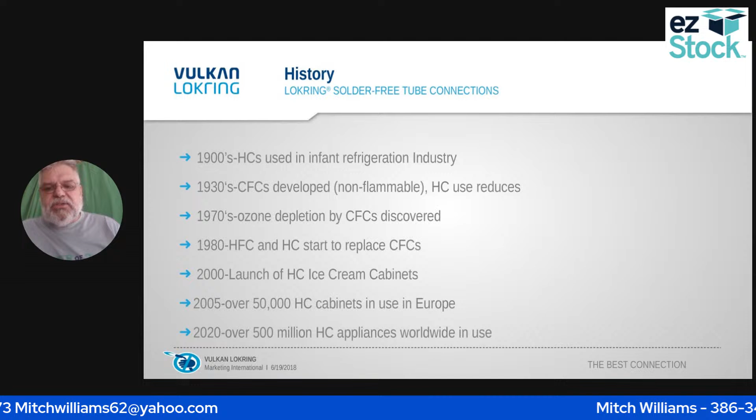So we had phased out the CFCs, replaced it with an HFC, as we are in 134A, which is what the HFC was, and then they started phasing out the HFCs and started replacing it again with the HCs, which is basically your butane mixture. Okay, so here's kind of a list of it.

R12, that's the first one. Whenever I was in my infancy stage as an employee working on refrigeration, that was R12 - that was the CFC. The ozone depletion rate was 1. Your 134A came about - R12 was phased out, we went to R134A, that was an HFC. At the same time, we had moved around and moved some other stuff in place of the R134A. They had come out with, in between the R12 and the R134A, what they called a hot shot - that was a drop-in for the R12. That didn't work very well, so they went ahead and moved to the 134A.

At that point, we moved from the 134A to the R600A in the refrigeration portion of appliances. Then you had R290. There is also an R441, which kind of replaces what they used in the ice machines. Then we had R404A - that's an HFC. They changed the R404A HFC to an R170, which is a hydrocarbon. And then, of course, the R32 is the HFC also.

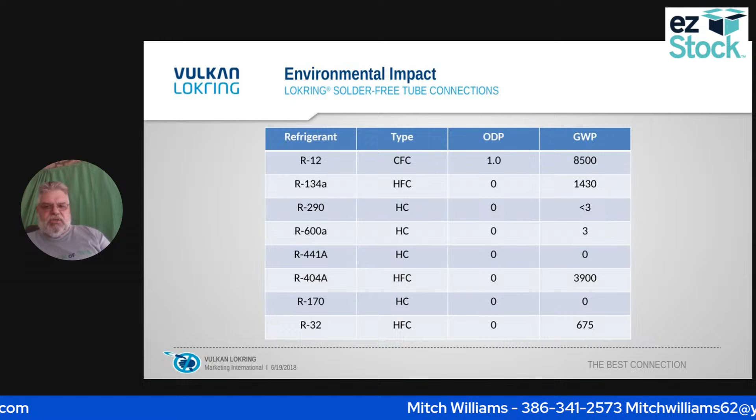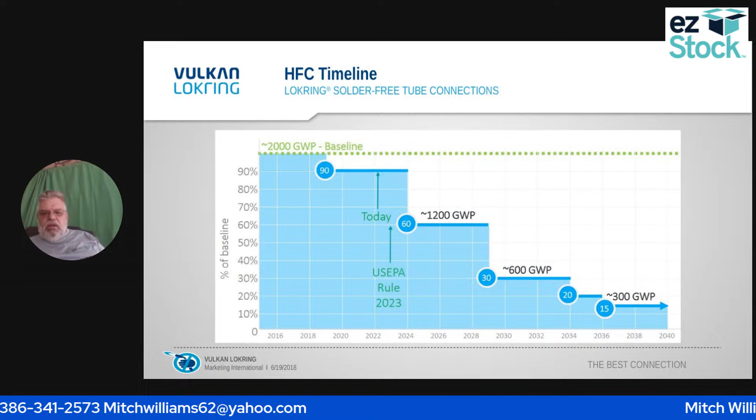That needs to pull out around 2029, I think is where it is. They're going to drop it again, and then they cycle it down to 20, then down to 15 - that's in 2036. If you've noticed, your refrigerant - if you release refrigerant into the atmosphere - it has changed from a $5,000 fine to a $50,000 fine, which is what they are at today.

So if you make the mistake of releasing refrigerant into the atmosphere and you get caught, they can fine you up to $50,000 today.

Okay, so we got R600, which is our A3 classification, and it does not require recovery. Same thing with R290. You don't have to recover 290, but they are flammable.

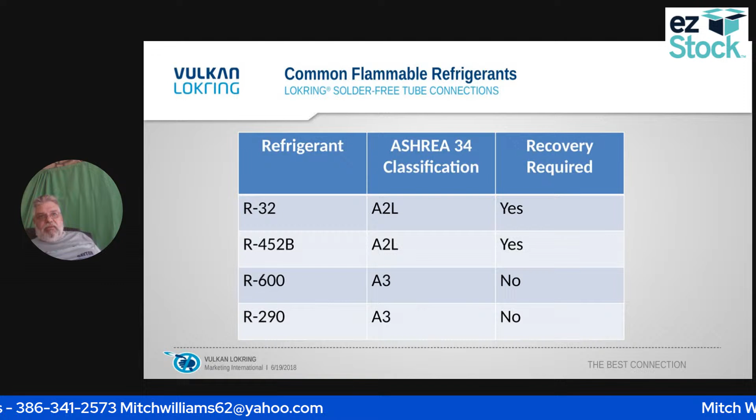This flammable refrigerant, you have to be very careful whenever you're using it. One of the things that people don't realize is that the oil in the compressor will actually absorb some of the refrigerant, and you can have a flash fire caused by that.

So exactly what is required for me to get flame? I need to have fuel, that would be my refrigerant today. Then I need air, that's all around us. Then we have to have an ignition source. So what people don't realize is everybody thinks, oh, my ignition source is my torch, which is true. If I have those three in combination, I get a flame.

So what happens is, if I fire my torch up, all I have to do is have refrigerant in the air.

I don't know how you guys heat your torch. Some use the clicker, is what I call it. It has a little round piece that has a spark, a flint that goes across it, and that will ignite your torch.

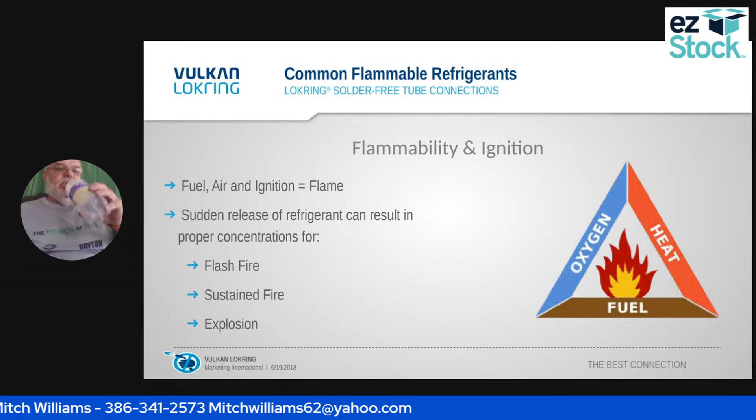So we don't want to use anything that could cause a reaction to get this ignition, this flame, to come out. So we don't want to use a torch. So what are the options?

One of the options is the Lokring system. Now, is the Lokring system the cheapest system out there? No, it's not. Is it definitely more expensive than some of the others? It is a little bit more expensive, but there's a reason.

These are tested. As long as you do use this unit, if I use the Lokring system, I have no problems having to go back. If I allow it to cure, the curing time, I'm ready to go.

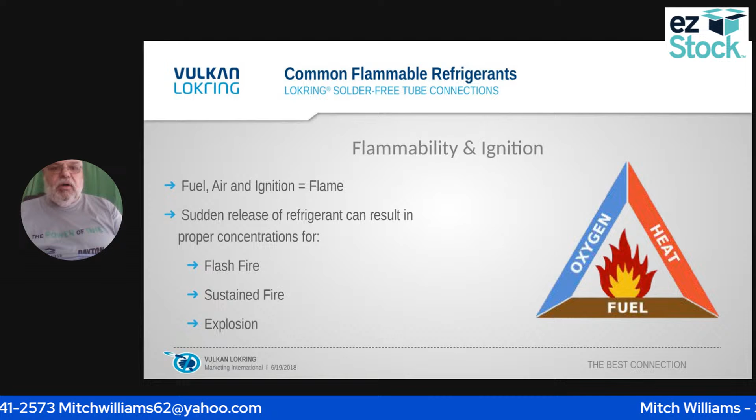So we're going to move on to our LEL and my LFL. Okay, low flammability limit, that's LFL, low flame limit. That's our R290 and R600A. R600A is at 1.8%.

The UEL and the UFL, that's the upper flammability limit. Our R600 is at 8.5, so that's pretty high.

So the last thing we want to do is get it so that we're having a flammability issue.

So who kind of regulates everything with us? The ones you want to be concerned with are the Environmental Protection Agency, the EPA, which is where you get the certification from. I'm going to need the National Fire Protection Association, the NFPA. I'm going to need the UL, Underwriters Laboratory. Then we have the International Electrotechnical Commission, the IEC. And then we have the American Society of Heating, Refrigeration, and Air Conditioning Engineers, the ASHRAE.

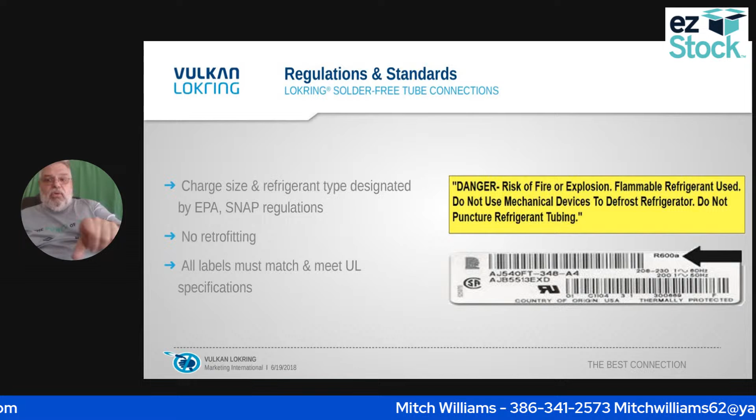Whenever I come in and look at the tag, I should see this: danger, risk of fire or explosion, flammable refrigerant used. Do not use mechanical devices to defrost the refrigerator, and do not puncture the refrigerant tubing. If you do, you run the risk of actually causing a fire.

So we're going to check what's on that label: our charge size, the refrigerant type, per the EPA and the SNAP regulations. So you can tell right there with the arrow that we are using R600A, which means we can't have any retrofitting done. All labels must match and must meet UL specifications.

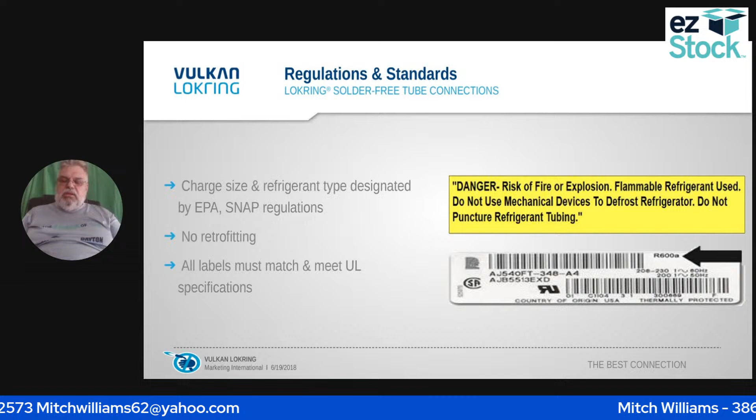Who kind of oversees all of this? AHAM, the Association of Home Appliance Manufacturers, and RSES. A lot of the others we don't really use.

One of the things I tell everybody whenever I'm doing refrigerant, and it's R600A, I have two things I keep right by my side. One is the fire extinguisher. What kind of fire extinguisher do I use? I have a dry powder.

If I carry the R600 on my truck, I have to have that. Of course, if I have that, then I have to have the MSDS sheet to go along with it. That has to be in my truck. You're supposed to have an MSDS sheet for anything that you carry in your truck. An example would be some of the cleaners. Anything that's refrigerant has to have your MSDS sheet.

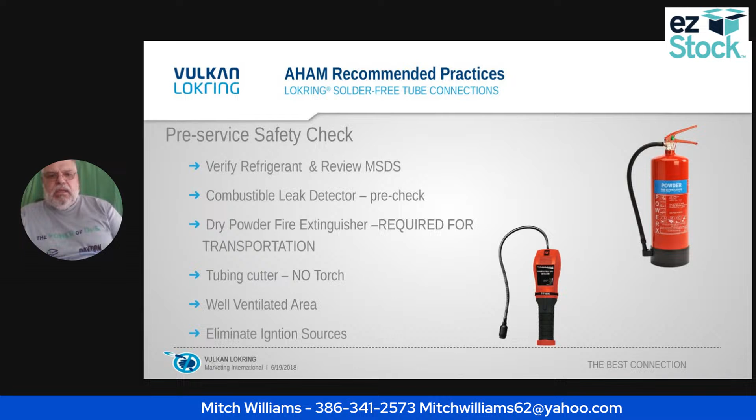I can use my dry powder fire extinguisher, and I can monitor any leakage with my leak detector. So we're going to go back and constantly monitor that.

Like I said, we're going to purge any gas into the external environment. That doesn't mean I do it in the house, because if I do, you're going to blow something up. Do not use an external heating source to defrost. In other words, you can't use a heat gun, and you can't use a hair dryer or anything like that. Do not use compressed air or oxygen if you're trying to flush something out, especially oxygen. If I'm using oxygen, that's one of the legs of my combustibility.

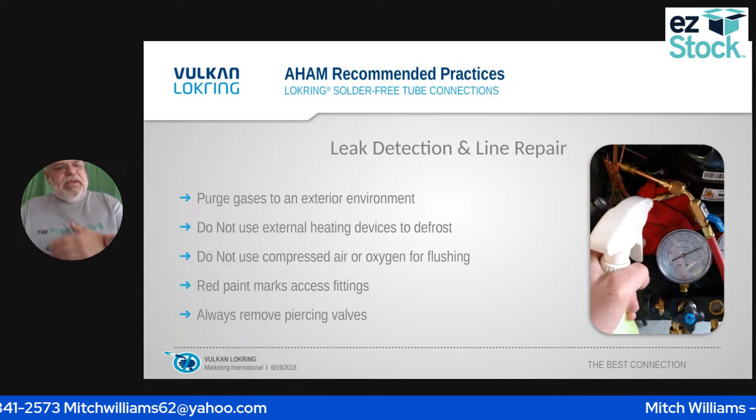Once I get through and I am done, and I have checked everything, and I'm satisfied with my work, I'm going to put red paint on the access fitting. That lets the next technician who comes out know that I have been in the system and repaired something. It also lets them know they need to probably ask the customer what was done last time. The other thing is, just like anything else, you're supposed to remove any kind of piercing valve.

Okay, so Lokprep versus UV leak detection. My Lokprep fluoresces with a bluish green under a UV light. Common refrigerant dyes show as a bright yellow - anybody that's used refrigerant dyes knows that most of them are bright yellow. The environmental condition is, of course, the lights off. You also have to have your UV light and my UV glasses.

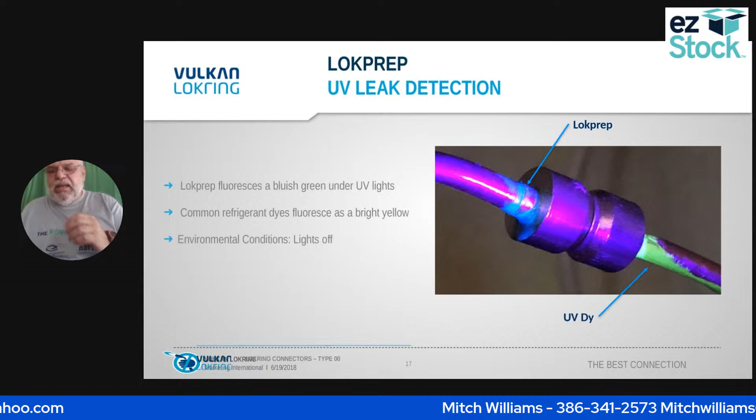Okay, so I'm going to repair any electrical faults. I'm going to secure any power. I'm going to discharge all the capacitors - once again, there's my spark. My system remains grounded. Then any of the lines that are going to be exposed, I have to insulate those lines that are exposed to corrosive material. Then I can renew my seals and sealing material.

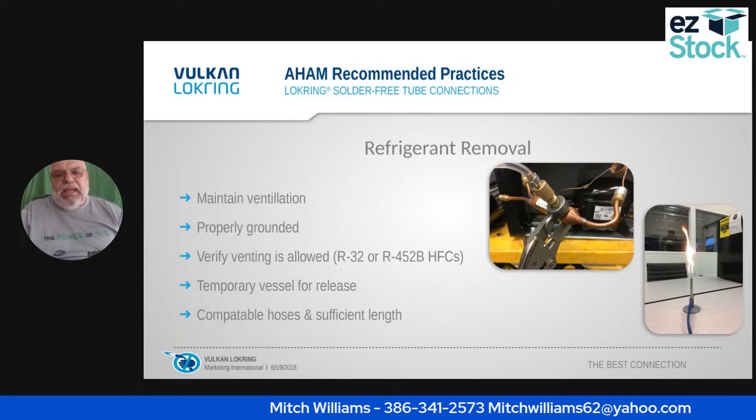After I get done, it is required for me to have this decal on the backs right at where the compressor is. It tells right here that it's an R600, and I have a flammability issue if I'm using it.

I have a guy I was working with who sent me a picture - I should have included it here. One of the guys was a new technician. The normal technician told him, 'Hey, listen, I got to go run to the office. Stay right here, don't do anything, I'll be right back.' Well, the guy said, 'Well, I just wanted to make sure that we got done as quickly as we could.' So he went ahead and used a torch to unsolder the compressor, and it burned down almost the whole shop that they had.

Okay, so my safety labels, I've got to have those whenever I replace them. If they're not on there, I have to carry some in my truck so that I can put those two labels on there. I'm going to use my red markings on my process tube. I'm going to install ventilation features - mine is a fan. Compressor oils may still contain residual refrigerant, up to 35% of the oil can contain refrigerant. 0 PSI does not mean zero refrigerant - that's one of the things you need to make sure that you remember.

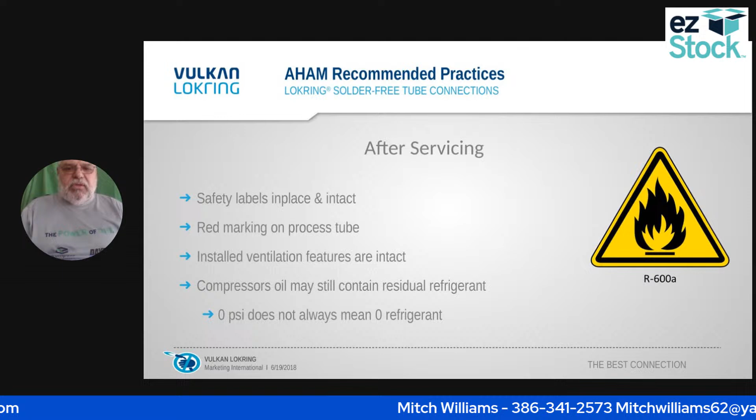Okay, here is this charging kit from Vulcan. If you see right there, there's about a 30-foot hose, maybe a little longer. It comes with the kit. There's the piece that I told you folded out - this is a picture of it, and of course you get everything that you're going to need in the kit, both the low side, the high side, the gauges, everything else. So this is a complete set.

It has a low pressure, high pressure manifold, R600 extraction valve, my liquid extraction disc, which is right there on the left hand side, the big piece that's white. We have a set of ball valves and T's that come with this kit. It has valve core depressors in this kit, and it also comes with the hoses - both the hoses right there that you see at the very top that I was talking about, and your regular hose that you use for your high pressure and your low pressure sides.

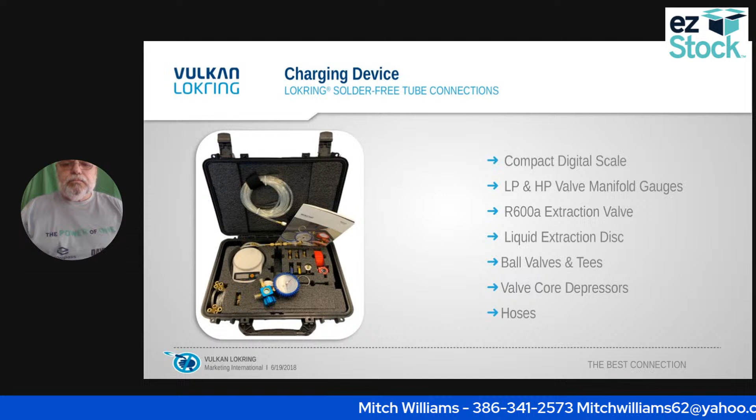Okay, so once I get everything done, I'm going to make sure I do a safety check. I'm going to monitor it with my leak detector, which I already mentioned. I just lay mine on the floor and it ticks. I've had one for years. Whenever I worked on gas, which is very popular in Atlanta, Georgia where I'm from, I always had one of these leak detectors. So I'm used to the ticking sound that the gas leak detector makes.

So you're going to run refrigerator for 5 minutes to warm the oil. I'm going to plug the unit in and let it run for 5 minutes.

The problem I'm going to have is if my compressor is totally bad and not working and I can't get it to work, then I've got to go ahead and cut the lines. I have to be very careful whenever I'm picking this up out of the back of the refrigerator, or whatever it is, could be an under-the-counter ice maker. I've got to be very careful, I can't spill any, because that oil still has a lot of flammability to it. Okay, I'm going to install a suction gauge, install the discharge hose to the piercing with the piercing pliers.

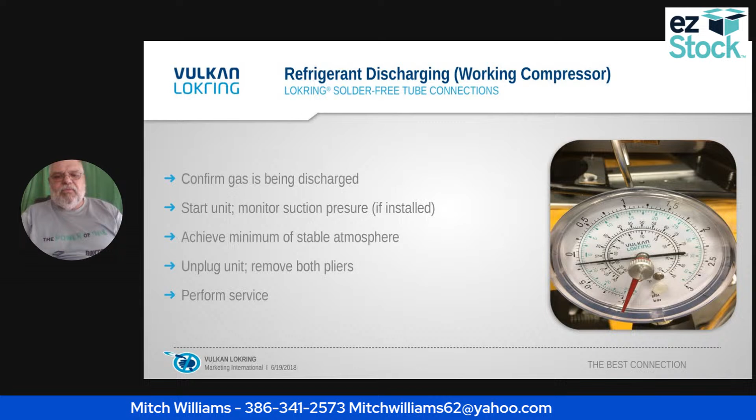So what I'm going to do is confirm the gas is being discharged. I'm going to start the unit and monitor the suction pressure. I'm going to achieve the minimum of a stable atmosphere. Then I'm going to unplug the unit, remove both pliers, and perform my service. Once I perform my service, I'm going to do a safety check and monitor it.

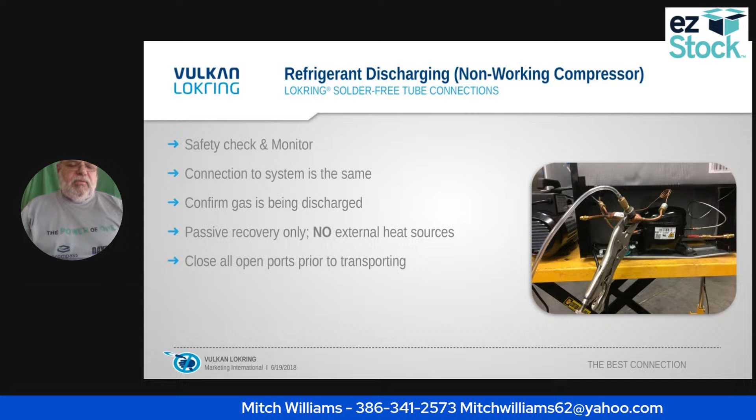This is for a non-working unit. The connection to the system is the same - confirm the gas is being discharged. Passive recovery only, no external heat sources, which is what we said from the very beginning. We're going to close all the open ports prior to transporting.

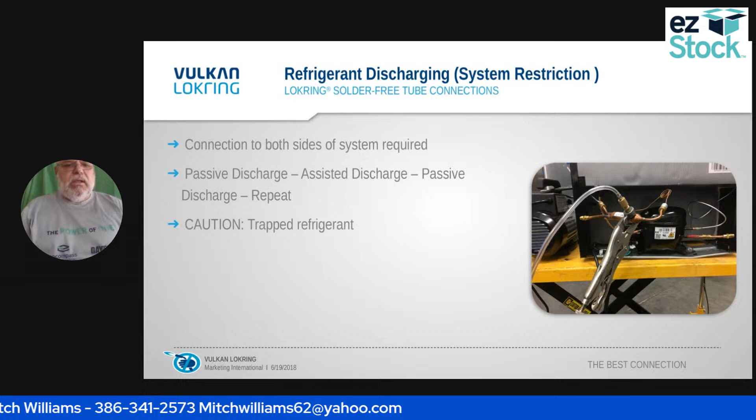So once again, I've got to, somehow, personally drain all of the oil into a container and then seal that container. My connection to both sides of the system is required - passive discharge, assisted discharge, and passive discharge again. Then I'm going to repeat it to try to get rid of all of the trapped refrigerant.

This right here, I'm going to tell you, if I was doing refrigeration work now, I would have a set of these pliers. I understand they're $174, but I still would have these. If I'm using any kind of refrigerant tubing and cutting it, I really, really like these tools. This tool right here is so great - I only have to do a quarter turn and I can cut everything off.

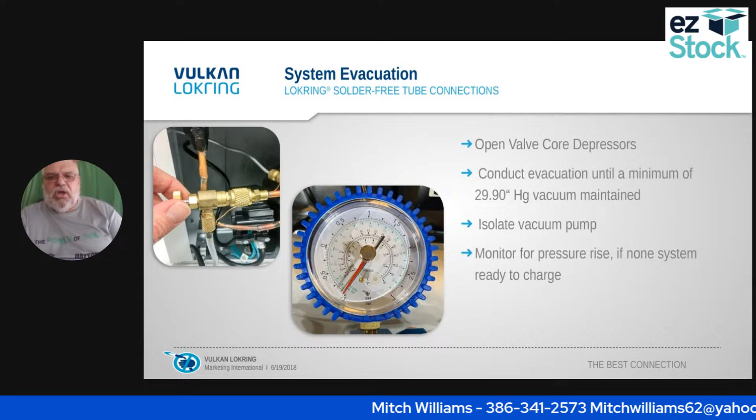We're going to evacuate the system, open the valve core depressors, conduct the evacuation until a minimum of 29.9 vacuum is reached. I'm going to isolate the vacuum pump, then monitor for a pressure rise. If none, then I'm ready to charge the system.

If this unit has 40 grams or more, I can charge from the liquid side. Up to 40 grams, I can't charge on the liquid side, only the high side, so I cannot charge the low side.

If I do that, I'll make this little valve explode. Not explode, but it won't work. And they check every single one that comes in. If you've charged it above 70, or nail it all the way on the other side, you're going to end up with a broken valve. That valve is no good.

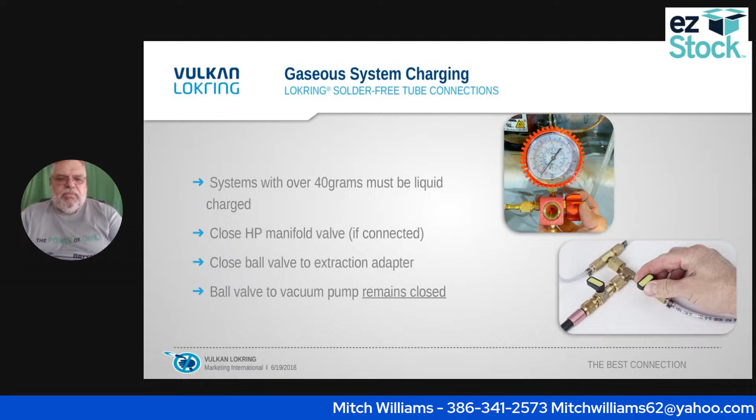Okay, I'm going to close the manifold gauge, close the ball valve to the extraction adapter. The ball valve to the vacuum pump remains closed. Place my bottle on the scale, tare it to 0 after placing it. Open my extraction valve on the bottle. Do not move the bottle from the tare on the scale at this point. If I do, I've messed everything up.

Okay, I'm going to open my ball valve, fill with half of the charge, and energize the compressor at this point. I'm going to cycle the ball valve until the charge is reached. Then close the extraction valve, open the ball valve once 0 PSI is reached, and close the low side manifold gauge.

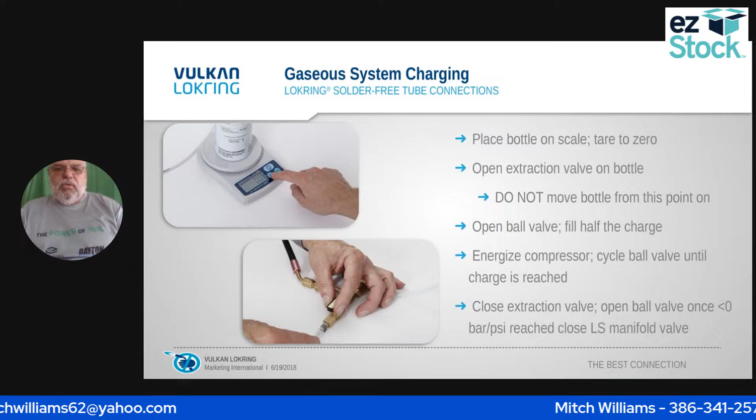So once again, they tell you it's not recommended to charge for charges under 40 grams. But I can, once it's over 40 grams, invert the bottle just like you do to charge on the liquid side. I'm going to close the manifold gauge, close the ball valve to the extractor. The ball valve to the vacuum pump remains closed.

I'm going to get a liquid line extraction disc, place the bottle on the scale, and again tare it to 0. Then I'm going to go ahead and open my extraction valve, pre-charge the ball valve.

Then open my ball valve, fill about half the charge, close the valve, and cycle the valve on and off rapidly until it becomes fully charged. Then close the extraction valve and open the ball valve. Wait 1 minute, start the compressor. Once 0 PSI is reached, close the low side manifold valve.

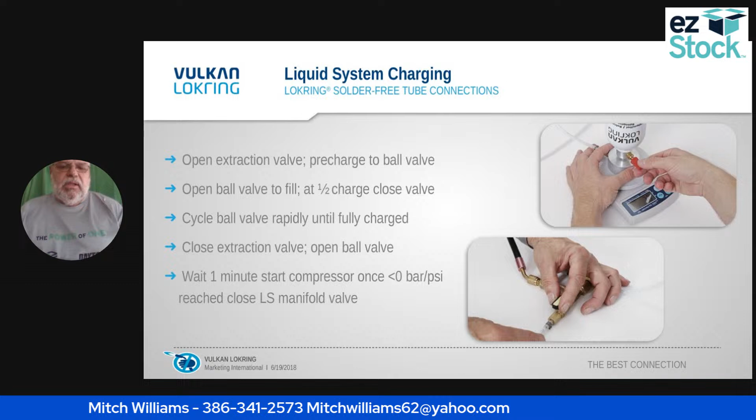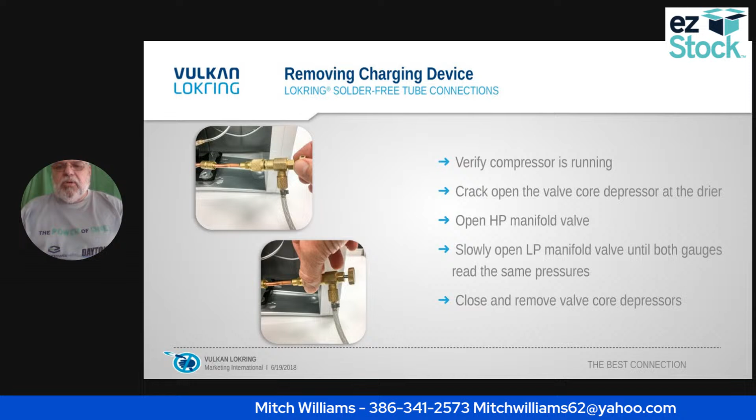Then I'm going to remove my charging device. I'm going to verify the compressor's running, crack open the valve core depressor at the dryer, open the high side manifold valve—sorry, that's a misprint right there. Then slowly open the low pressure manifold valve until both gauges read the same pressures. Then close and remove the valve core depressors.

I'm going to apply LOKPREP to any of the threads, then install the caps. If a more permanent seal is desired, I can crimp it right there near the Schrader valve. Okay, I'm going to apply my red paint to the service point, so that if another technician comes in, they'll know somebody has worked on it.

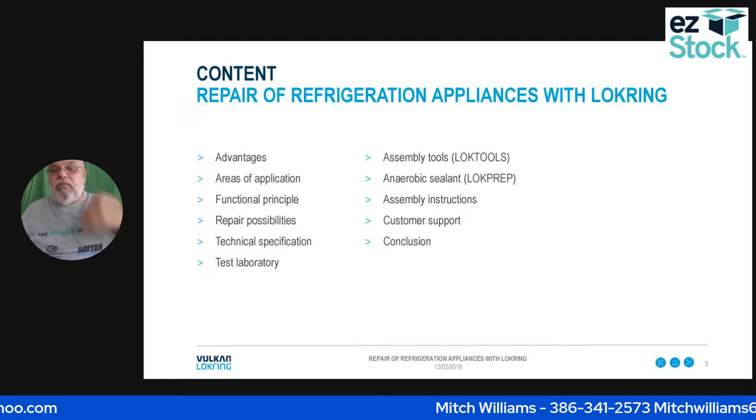Okay, now we're going to talk about the repair of refrigeration appliances. Normally this is a 3.5 day class. The first class is what we just went over, and the next class is this one right here. We're probably not going to have time to go back through it since nobody's in the meeting today, and we don't have any comments, so we'll just keep moving along. This will be available in about a day on the website, and you can review it in case you wanted to. So, repair of refrigeration appliances.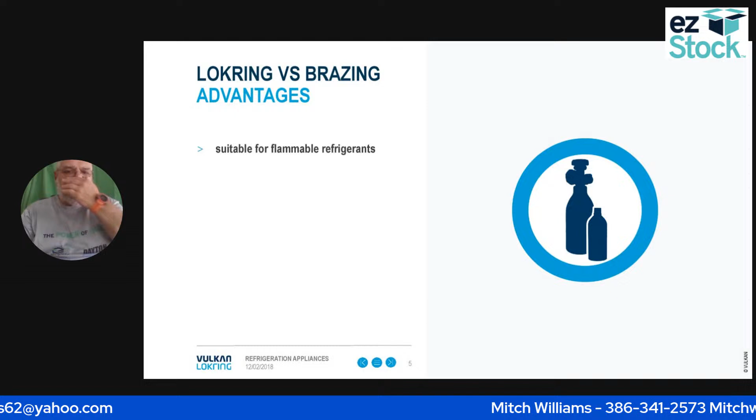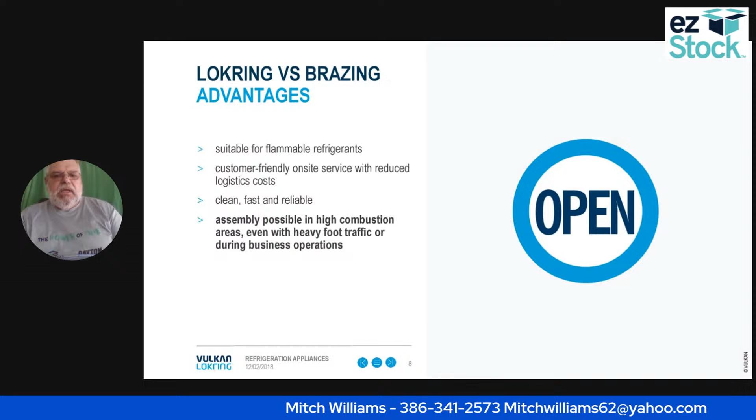Advantages to the Lokring system: suitable for flammable refrigerants, customer-friendly on-site service with reduced logistics cost because I don't have to take it out of the house and bring it back in. It's clean, it's fast, it's reliable. Assembly is possible in a high combustion area—what does that mean? If I'm working in a restaurant, I can actually do it while people are around, even with heavy foot traffic or during business hours.

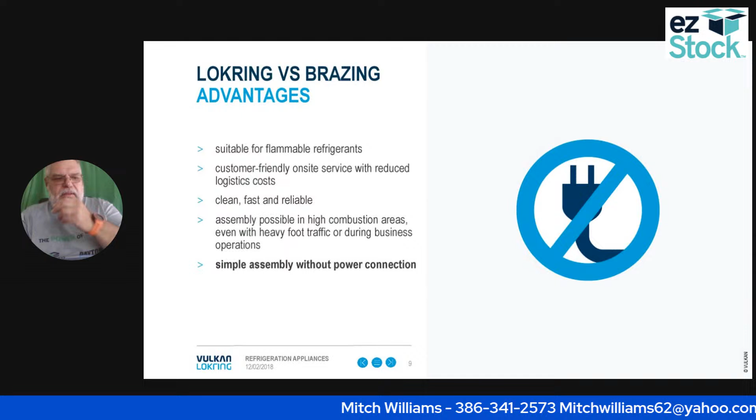Simply assemble without the power connection. The only power connection that is ever needed is to plug in my vacuum pump. Again, brushless vacuum pump. If I use my regular vacuum pump, I can start a fire.

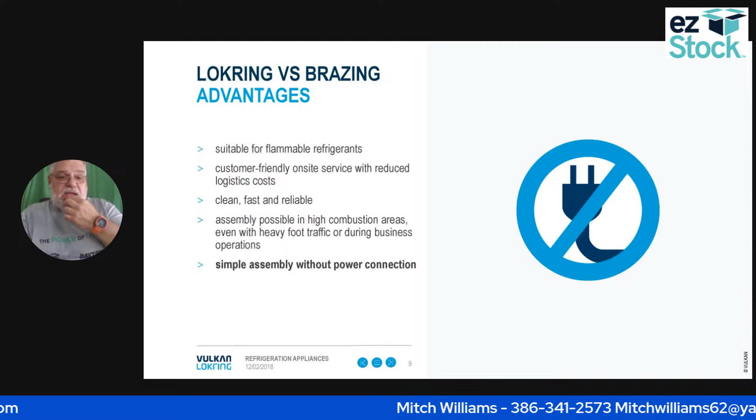No heavy brazing equipment is necessary, and no brazing related quality problems.

So can I use the Lokring system for my 134A? Absolutely. One of the guys said he had gone in and repaired a leak he found in the evaporator on a refrigerator, and he used this system to actually repair it. The customer didn't have to be without his refrigerator for a couple of days. So he really likes it.

I like it too. Since we're all going to R600, you might as well save your pennies, because this is what you're going to have to do. You're going to have to use something similar to this, so you might as well buy the best. If I'm going to do it, I'm going to buy the best I can. I want the most bang for my buck. With my Lokring, I don't worry. If I follow these steps with Lokring, I don't ever have any problems.

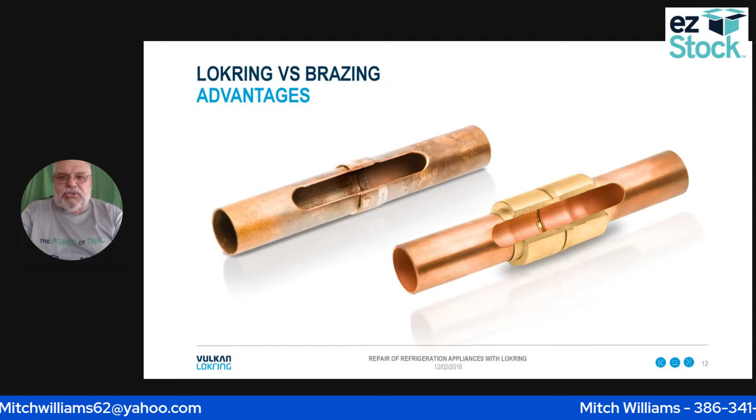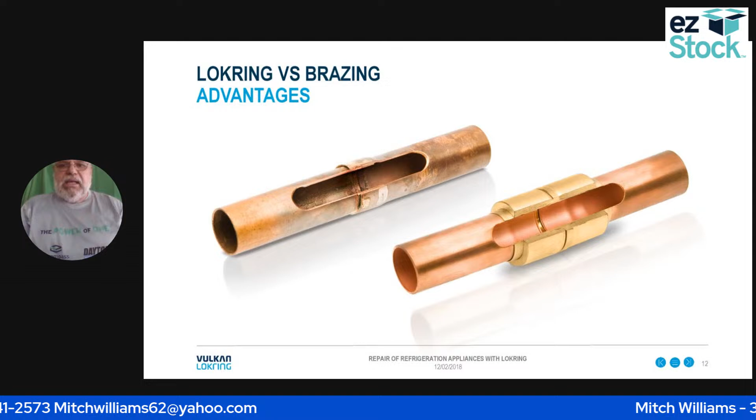That's the last thing you want. With my Lokring, I don't have to worry about it. I'm not brazing anything, I don't have any open flame. I can get it into any little crack or crevice and use it there.

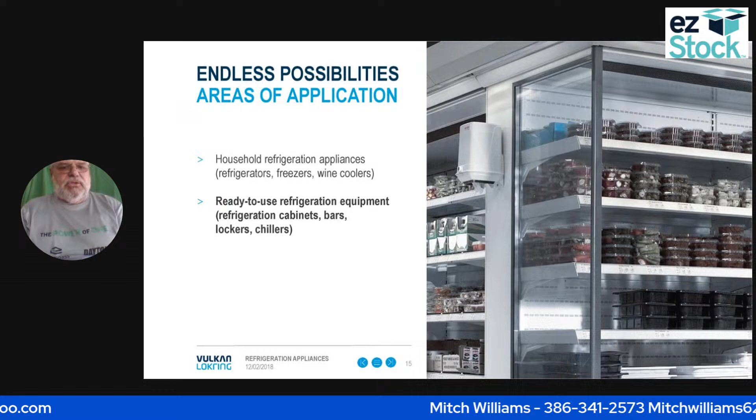My areas of application are endless: household refrigerators, freezers, wine coolers, anything with any of the refrigerants. Endless possibilities. I can also use it for refrigeration equipment like cabinets, bars, chillers, lockers, the refrigeration in a restaurant, refrigeration equipment for catering, sales counter refrigerators, flow through coolers, and portable cooling systems. I can use it for all of that.

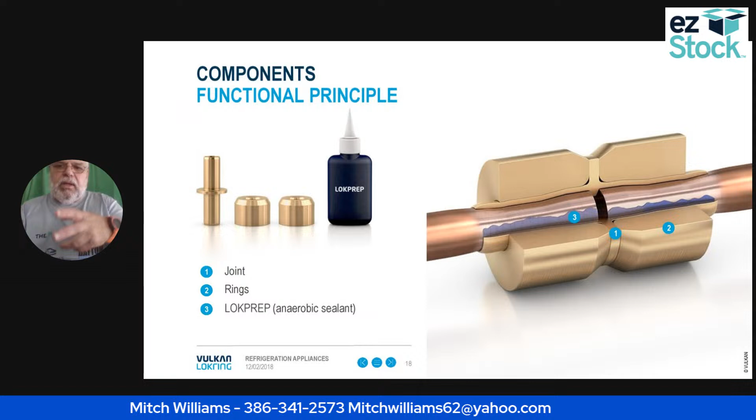Then I'm going to use LOKPREP and put it in there, spin it around so that it coats all the way, and I'm in good shape, and I can go ahead and close the joint.

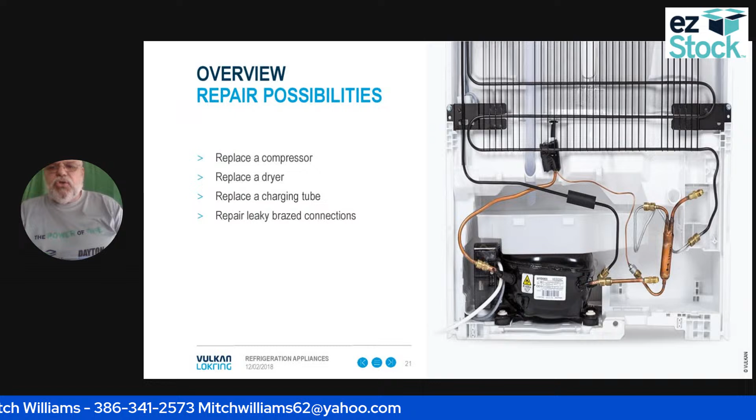Our repair possibilities with Lokring — like I said, you can repair anything. I can replace the compressor, change out a filter dryer, replace a charging tube, and repair leaky brazed connections.

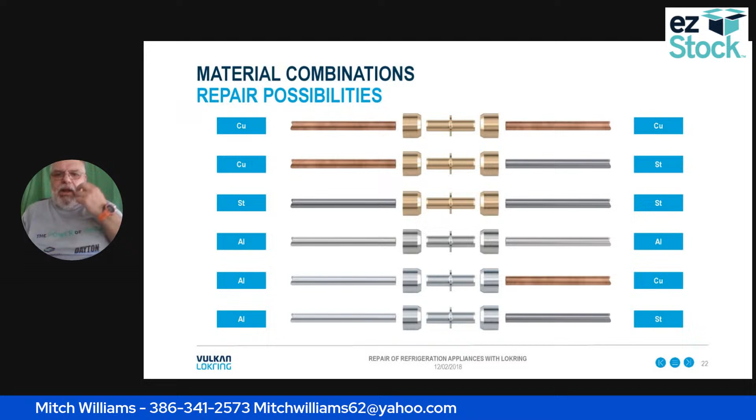So what kind of material can I use? If I have copper, I can go copper to copper, or copper to steel. If I go steel to steel, I'm still going to use those little brass fittings. Then if I go aluminum to aluminum, that's my aluminum fitting. If I have aluminum to copper, I'm also going to use that aluminum fitting, and same thing if I'm going aluminum to steel, I'll use the aluminum fitting.

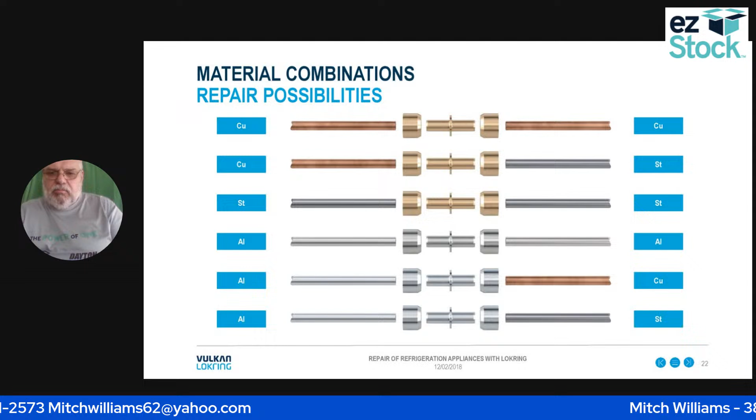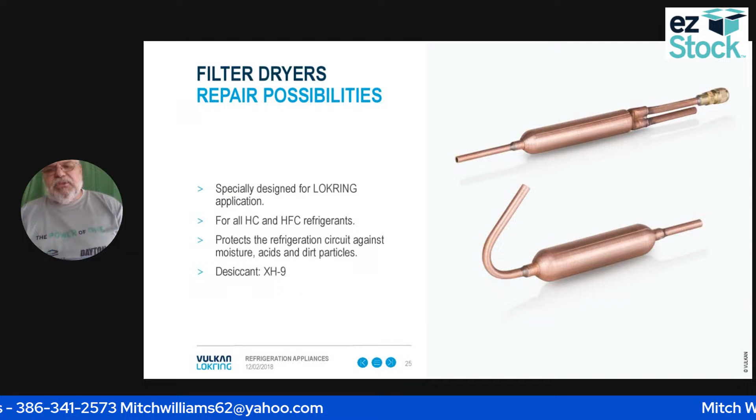Specially designed for Lokring application, that was the filter dryer that I've already shown you. It has a desiccant of XH9, which is the same as any other filter dryer. So the other thing that I need to look at is my capillary tube.

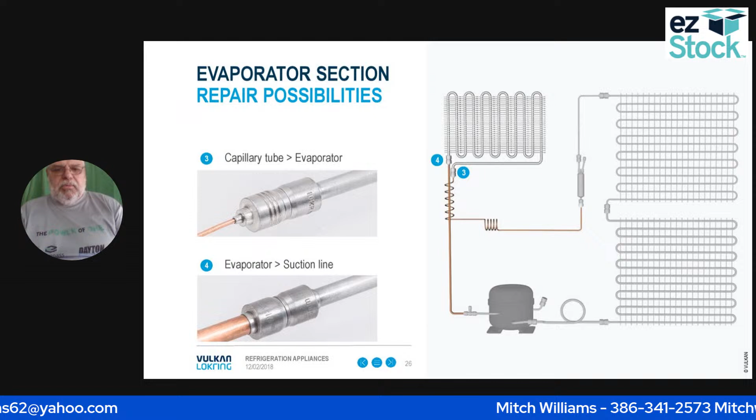You can tell that I've gone from a copper to an aluminum. If you notice, that fitting is all aluminum. Then if I'm going from my evaporator to my suction line, which is number 4, you look right there, you can use the copper to aluminum fitting. I'm going to use that aluminum fitting.

If I'm going to replace, let's say that I have a bad joint that is in the condensing coil itself, I can actually repair that with the Lokring tool. I don't have to go and order it. I don't know if you work on any Viking. Viking had a unit, their refrigerator, they tried to help cool it.

They had it go down into where the compressor is, and whenever your water drained, they would help evaporate the water by using the liquid line, but it always leaked. So I can use this to replace that. I do not have to cut and solder, and I can just use my Lokring kit, and it's a whole lot faster.

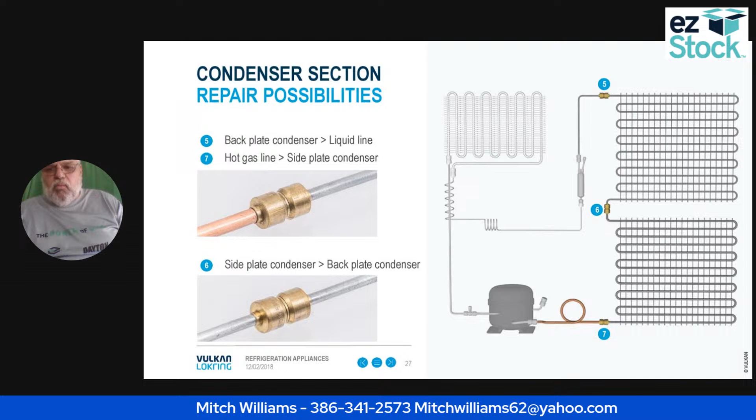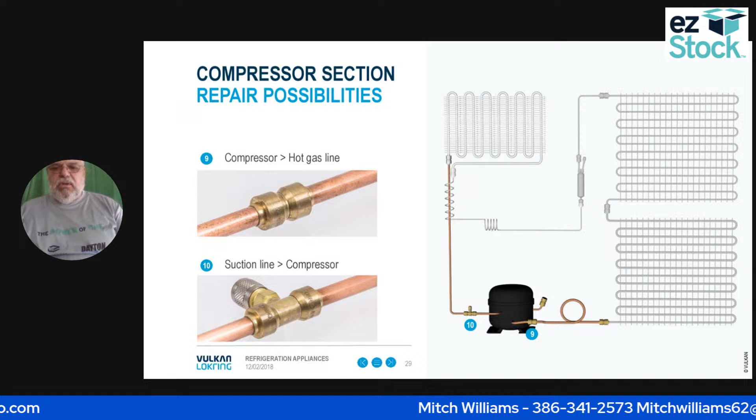Then I have number 9, which is my hot gas line, shows you right there, that's number 9. Number 10 is my suction line in the compressor. So I have a fitting that I can use, you can see it right there in number 10. So I can use that for another source to tap.

Okay, my technical specifications: it's UL SA 12004 approved. Reference, the maximum operating pressure, of course, is 25 bars, which is 360 psi. My temperature range is minus 58 degrees up to 302 degrees. My tubing diameter is 1/16 to 3/8.

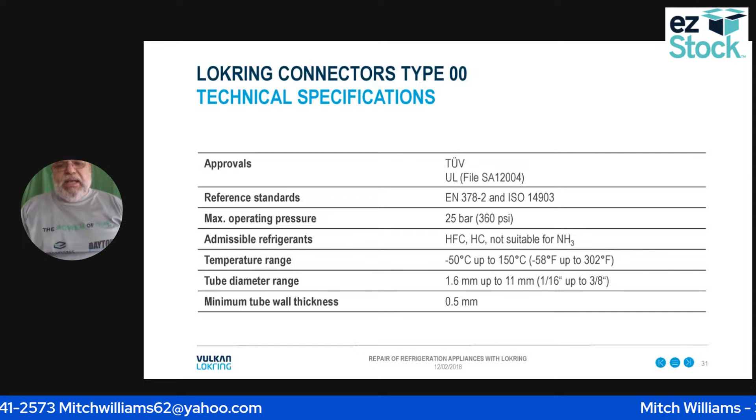This is for the 00 fittings. My minimum tubing wall thickness is 0.5 millimeters, so it has to be at least a 0.5 millimeter wall thickness.

Okay, laboratory. Their laboratory is set up according to ISO 14903, which is what is everything now. The unique laboratory performance test, of course, uses ISO 14903. It's actually in Germany, that's their test lab. They do all of these tests.

So they have a tightness test that they check to make sure that there's no leak. Then they have a fatigue test, a freezing test, a vibration test. Then they have a pressure cycle temperature test, then a vacuum test. Once they advance from the vacuum test, they put it back into a pressure test, which is a static pressure. And then after they get done, they do it at the very beginning for the tightness test, then they do it at the very end to check the leaks.

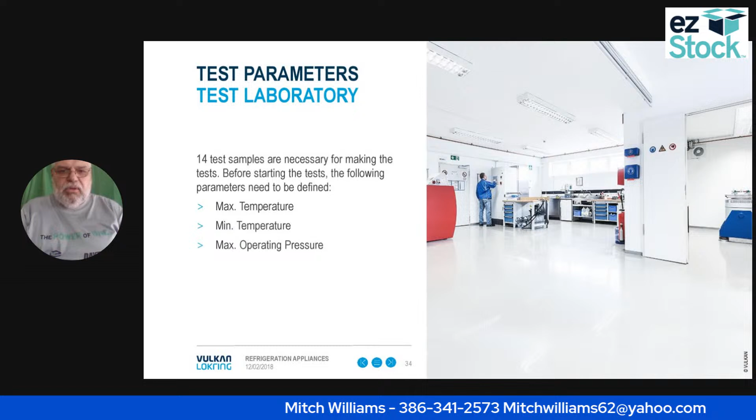Okay, so what kind of samples are they doing? They take 14 test samples, is what they use before starting the test. The following parameters are defined: the maximum temperature, the minimum temperature, the maximum operating pressure. So those are all defined before they start any of the test.

For the tightness test, before the load test, they use helium gas. They put it at about 68 degrees Fahrenheit, with a pressure difference of 145 psi, and the maximum leakage rate is 7.5 times 10 to the minus 8 millibar, which is huge, so small.

For their fatigue test, they cycle between the maximum operating pressure and atmospheric pressure. They cycle this 250,000 times. So I'm going to check all 14 of these and run it through a cycle test, which is 250,000 cycles between the maximum operating and atmospheric pressure.

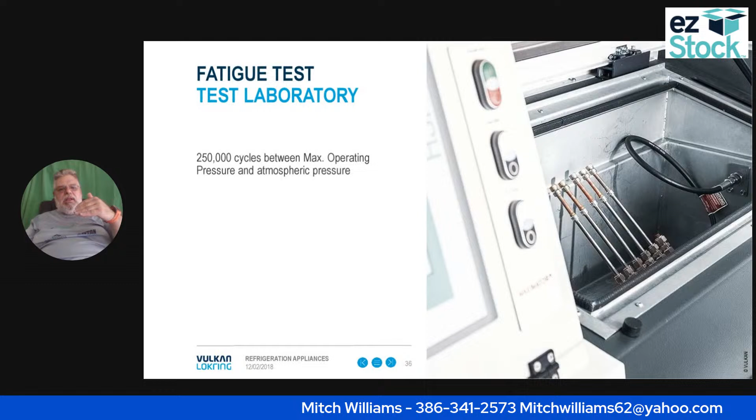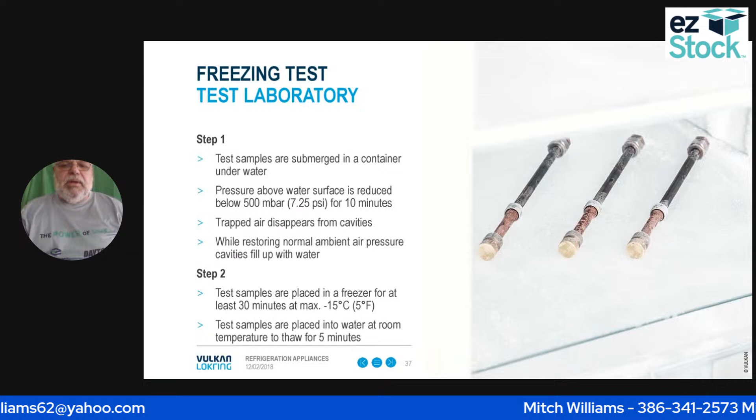Next, they take the test samples and submerge them in a container underwater. The pressure above the water surface is reduced below 7.25 psi for 10 minutes. The trapped air disappears from the cavities while restoring to normal ambient air pressure, and the cavities fill up with water. The test samples are then placed in a freezer for at least 30 minutes at a maximum of 5 degrees Fahrenheit. Then the samples are placed into water at room temperature and thaw for 5 minutes.

Once it passes this test, I have to put it into a vibration test. I take 2 million load cycles, and it runs at a frequency of 200 hertz. The amplitude is dependent upon the size of the connection.

For my pressure temperature cycle test, the first thing I'm going to do is 50 cycles, alternating the temperature between the minimum and maximum temperature. When the maximum temperature is reached, the test samples will be inflated to the maximum operating pressure for 2 minutes. That's what happens over the 50 cycles.

Then on the second step, I'm going to use 200 cycles. The maximum temperature is held, and my pressure alternates between atmospheric pressure and the maximum operating pressure.

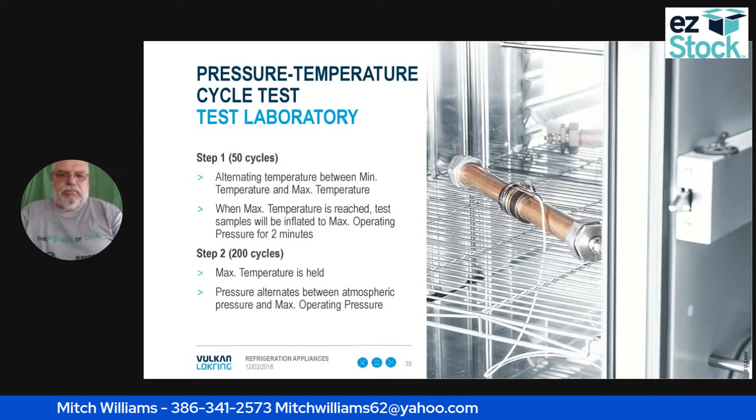After this test is complete, it moves along and I do the vacuum test. This takes an hour. The temperature is 68 degrees Fahrenheit, and my maximum pressure is 0.2 millibars.

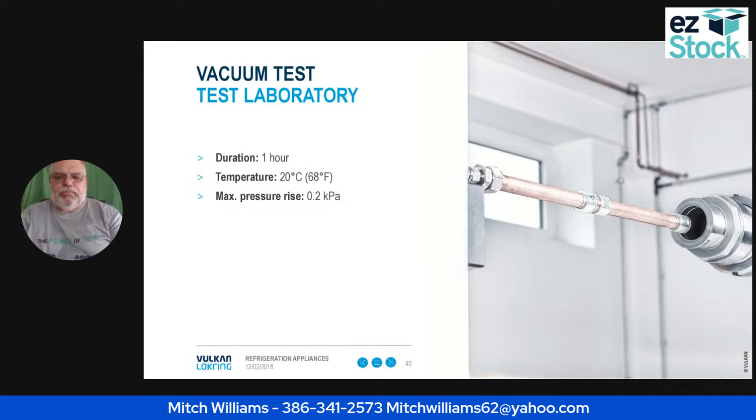After it passes that test, I go to my test laboratory and do my pressure test, which is a static test. It goes for 1 minute. All 14 of my test subjects go 5 times the maximum operating pressure, or the theoretical maximum load of the tube.

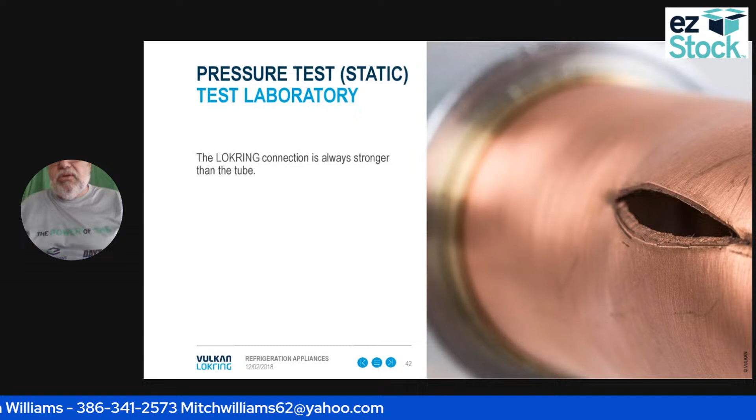For the pressure test, the Lokring connector is always stronger than the tube. As you can see, this one is blown out where they inflated it so high.

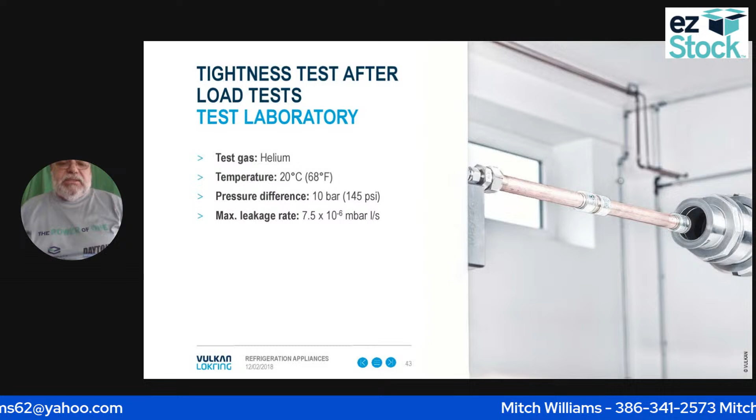After they finish that, they do a tightness test after the load test. It's helium gas again, at 68 degrees Fahrenheit. The pressure difference is 145 psi, and the maximum leakage rate is 7.5 times 10 to the minus 6 millibar.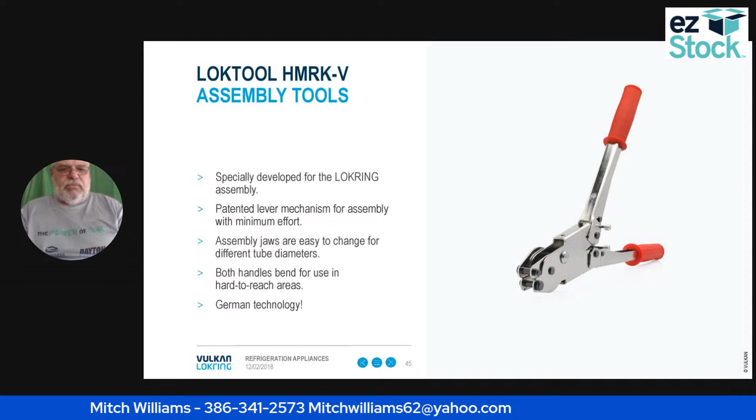Now we're going to move on to the assembly tools that we use. This HMRK is your assembly tool, specially developed for Lokring assembly. Its patented lever action mechanism is used for minimum effort. They also have a version that's powered, where you don't have to do anything at all, you just press a button and it seals it for you. You have to be a whole lot more careful with that, but it's very nice and quick, though very expensive. My assembly jaws are easy to change for different tubing diameters. Really, the only time you have to change the jaws is when I'm working with 3/8 tubing. Both handles bend, which is very nice for hard to reach areas, and of course it's German technology.

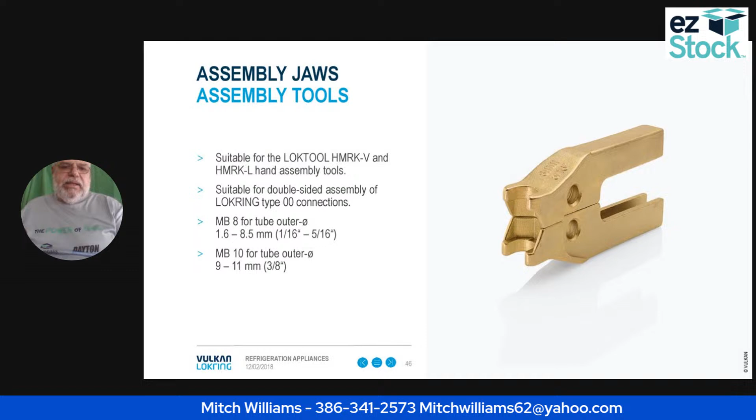So the assembly jaws: the MB8 is for 1/16 to 5/16 inch tubing, and the MB10 is for my 3/8 tubing.

So for LOKPREP: without LOKPREP, the system doesn't work, and you have to have fresh LOKPREP. Anything over a year old, you throw the tube away. So for double O refrigerant, double O size, I'm going to use my LOKPREP, which is 65G.

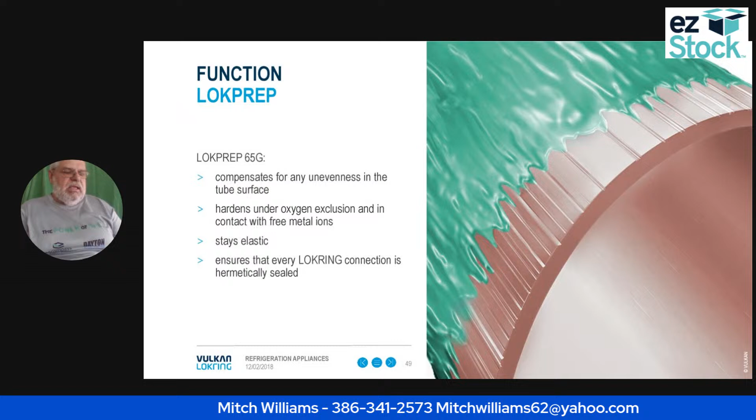My LOKPREP 65G compensates for any unevenness in the tube surface itself. It hardens under the oxygen exclusion and in contact with free metal ions. It stays elastic, ensuring that every LOKRING connection is hermetically sealed.

Okay, my assembly instructions for the LOKRING, type 00 connectors.

Okay, so I use the double loop method. That's the way I was taught. Like I said, I've done this so long that it's all second nature, so that's the way I use it.

Okay, so once I get this all cleaned up and I'm ready, and I've got the two pieces cut, I'm ready to make my connection. I'm going to apply my LOKPREP 65G to the tubing end. I insert it all the way in. Then I do the same thing on the other side, quickly insert.

The other end. I hold that connecting so that I can spin it around. They say 360 degrees, but I do 720.

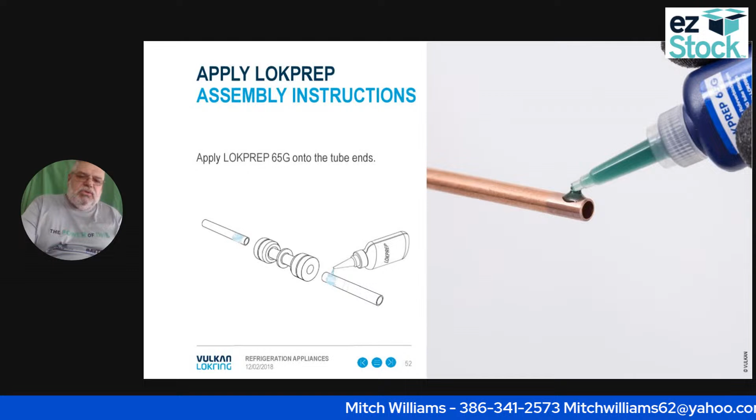Okay, so I'm going to insert my tubing ends into the LOKRING connector until the tubes reach the inner stop. That's what we're trying to do. You see the inner stop, which is right there.

So I've got to pull these together, and I've got to hold my fitting so that it never slips. I actually take two fingers—that's how I hold the fitting—and then I hold it in place so that it's not going to move, and I've got a good connector.

Okay, so I'm going to rotate that LOKRING connector 360 degrees. Like I said, I do it 720—at least two turns, which would be my 720. That changes and distributes all of the LOKPREP 65G evenly.

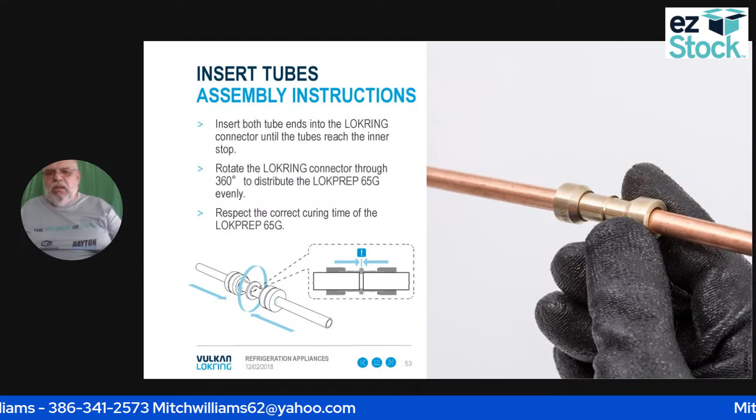Okay, then I'm going to make sure that I respect the curing time for the LOKPREP once I get done. Before I put anything else in, I'm going to let it sit—at least 10 minutes. It all depends on the temperature that you're at.

Okay, so I'm going to push the rings onto the joint. This is where I hold it. If you look right there, that's whenever you get it at the beginning. Of course, you're holding it, then you start cranking it using.

I'm left-handed, so I always put it in my left arm, and I crank with my right hand. I usually crank it and go 1, 2, 3. You'll hear it click, click, click, click, click. Then I release it. Click, click, click, click. I release it.

It's easier for me doing it that way. Some guys can just hold it and close it all the way up, and they do fine. I'm a little more cautious.

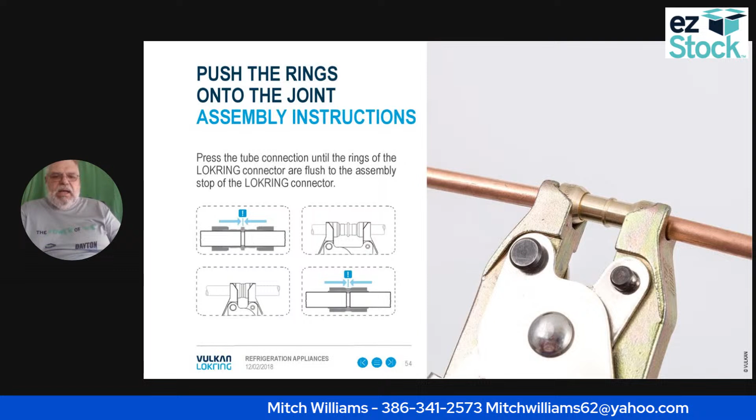Okay, so you can see in slide number 2, that's on from slide number 1. I'm pressing the ends together. Once I get done and pushed it all the way in, this is what happens—it seals my tubing totally.

Like I said, you have to respect your curing time—it has to be at least 10 minutes. But does that mean I just sit there for 10 minutes? Oh, absolutely not. I'm getting everything cleaned up, getting it ready so I can take my installation kit back out, bring my other kit back in, so that I can charge the system. I use that time wisely.

Okay, so Lokring support. There's a dedicated training system in place, in-depth Lokring theory, practice, and then you get certification.

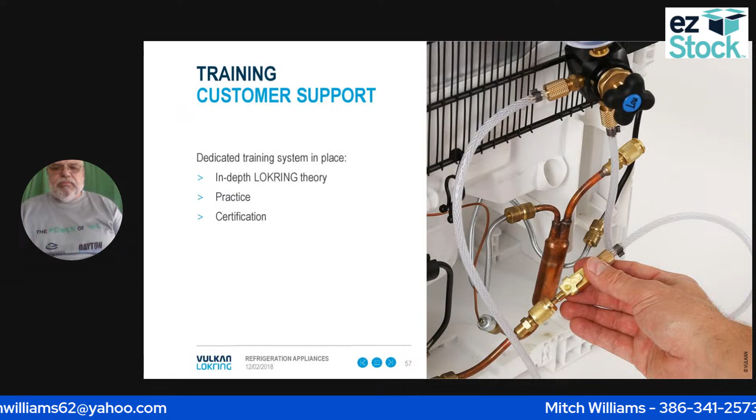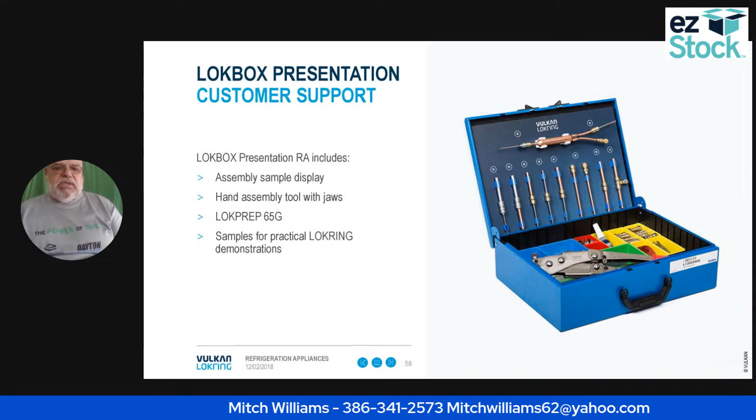So this is the LOKBOX presentation. Here's what it includes: the assembly display kit, hand assembly tool with jaws, LOKPREP 65G, and samples for the Lokring demonstrations.

Okay, this is the conclusion of our program. Like I said, we have nobody in the class, so we're just going to go ahead and complete our class.